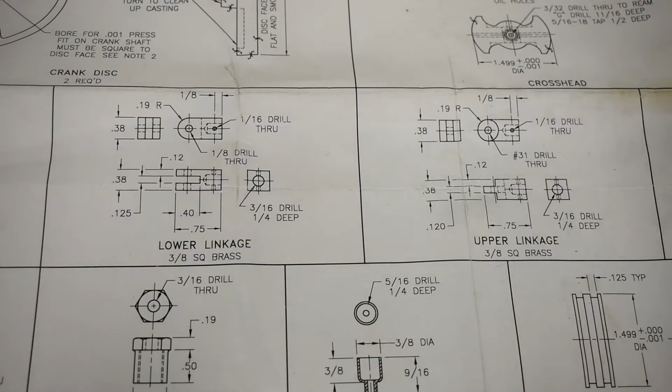I'm still waiting for my 5/8 precision ground steel round bar to come. So the crankshaft has been put aside for the time being, and while I wait for that I'm going to move on to these two parts. Now here we are. There's the piece of 3/8 square bar that they supply, and simple enough parts. And what I would like to do is make use of my rotary table for these.

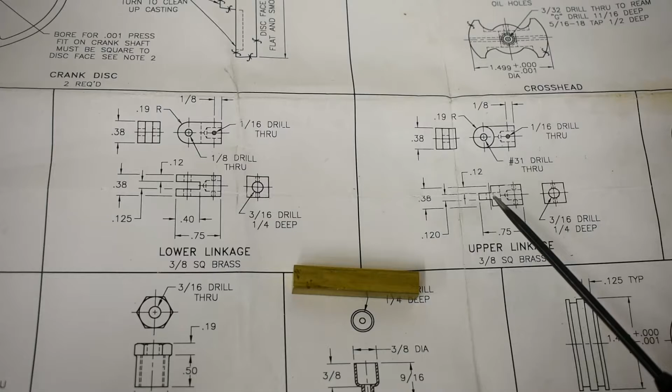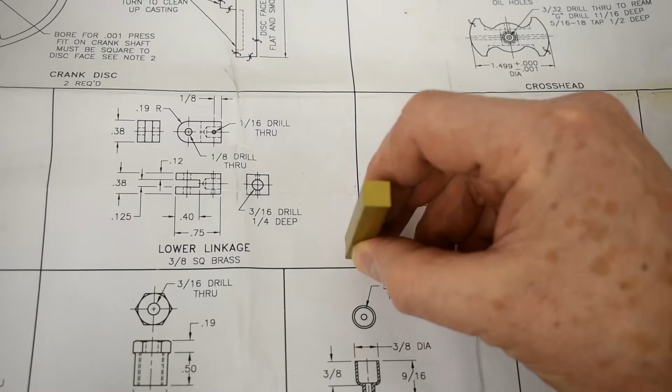So these two parts play together, so you can see this part has a tongue that will fit into this groove, and this part has a machined radius feature on it and a radiused end, as does this, so that they can swivel within each other. So a number of ways of making that feature. Of course, you can use a corner rounding end mill, stand this part up and round the corners. You can use a filing button to accurately hand file that shape, or you can freehand it.

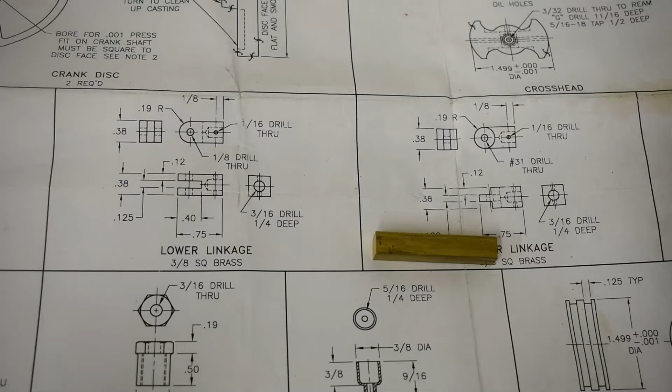But I've decided that the way I want to do this is to use a rotary table, and I'm going to use a technique and a tool that I got from Joe Pie. Here's the tool. Now you can certainly make these. I chose to buy one directly from Joe Pieczynski's website. He does two sizes of these. So there's a smaller version for smaller mills, but this is a really useful setting up tool.

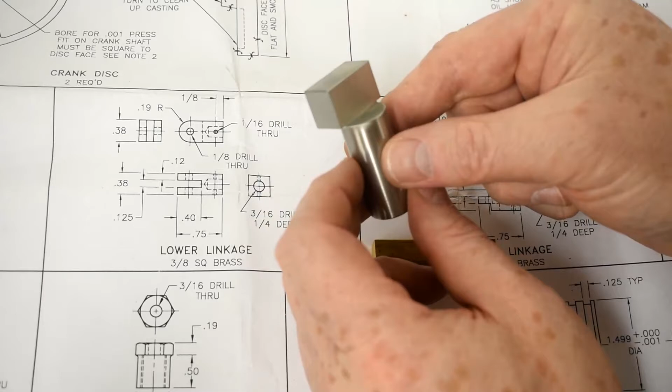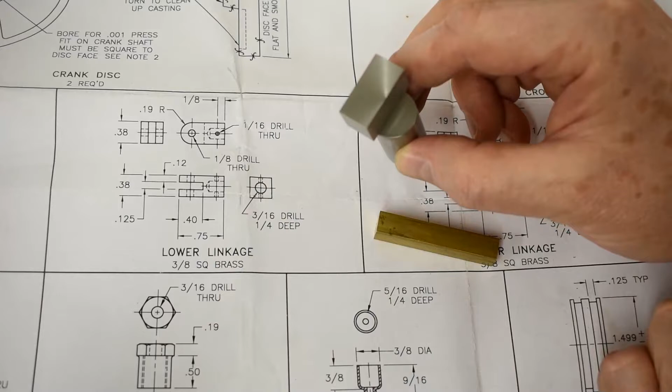It's a 3/4 inch diameter with an accurately machined rectangular boss on the end. This face is accurately on center, and then these two faces are each .500 away from center, and this face is .500 away from center. So this becomes a really excellent tool for setting up a vise on the mill, or indeed has a number of other uses.

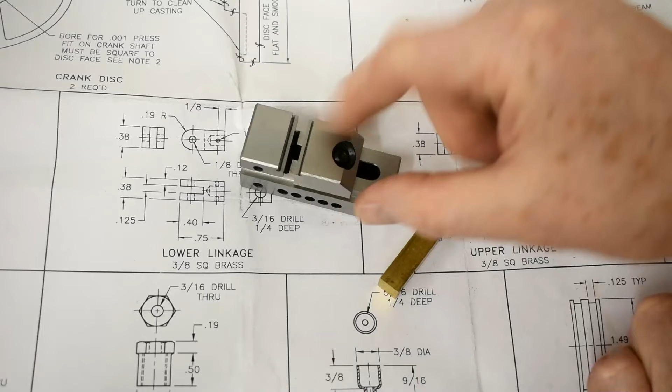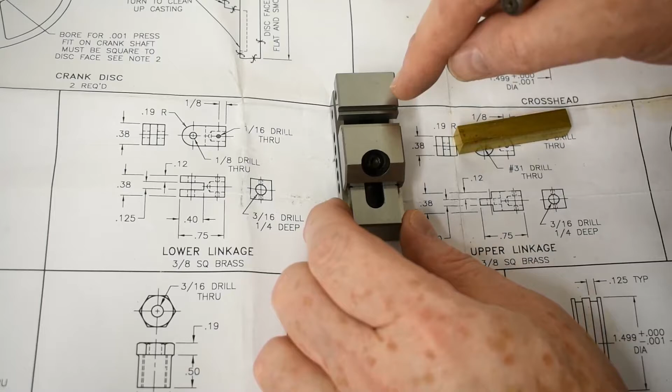But with that in mind, here is the teeny tiny toolmakers vise that I just acquired, and this is what I'm going to use to hold this piece of stock, and probably another piece of stock as well. So I can easily clamp this, and I can position it and find center with the milling cutter, and then the idea is that I will find this fixed face, position it half the thickness of the material so that I establish the center line of the material, and then I can use the rotary table to rotate it around under the cutter to form that radius.

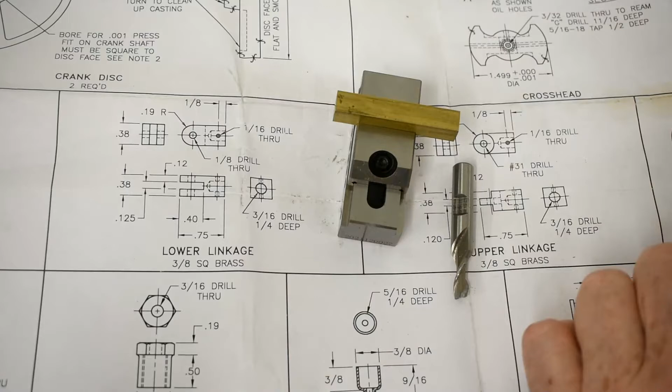So as I set it up, we'll get more into that. I'm going to use this tool to accurately find the location of the fixed face and get the center position, and then I will start by cutting this part, and we'll see how we get on. Alright, off to the mill.

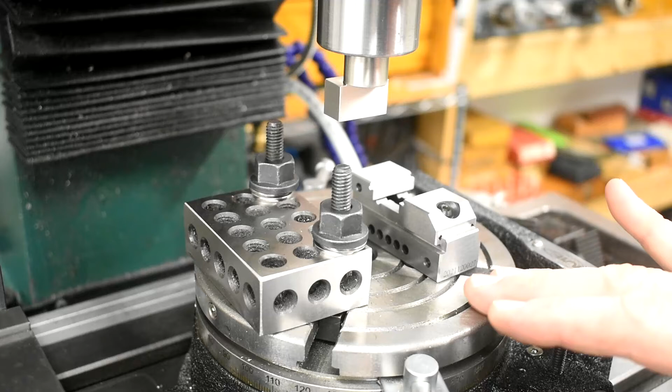So this is my rotary table. It's a 6-inch rotary table. It's an import, so it's a very reasonable price, and honestly the quality is actually very, very good for what I paid for it. And this is actually the first time I've used it, which is one reason why I'm so interested in using it to put a radius on the end of this square bar, because I just want to try it. So I have a 1-2-3 block clamped in place. This is going to provide a straight edge,

and then the next part of the approach will be to use the alignment tool to position this vise relative to the center of the table. Now I've already found the center of the table. I used my coaxial indicator to do that, so that is set to 0. So this surface is now trammed and is moving parallel to the y-axis in and out of the machine. So now I can continue with the setup.

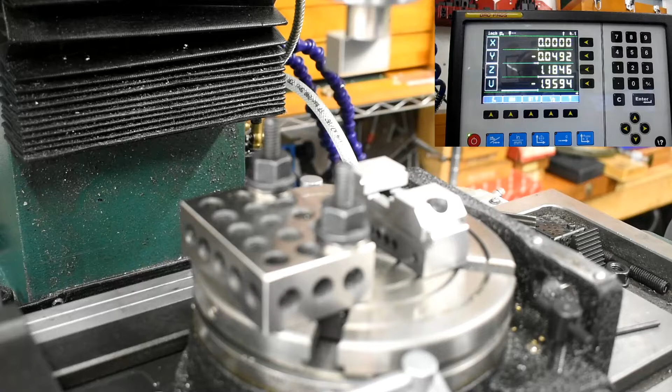So the basic idea here is to set the vise up like this. And what I'll use is an adjustable parallel here to keep this vise parallel to this surface once I've established location of this surface. So right now we know that this surface is right on center line of the spindle. I found the center of this earlier on, so I can position the rotary table on the center of the spindle as well. So now what I'll do is return the spindle to 0. There we are. The table here is locked, by the way, so that I can't lose this position.

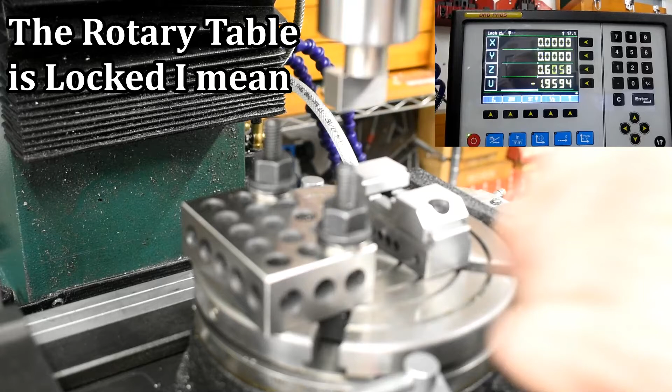Now we'll bring the alignment tool in. And we want to know where the fixed jaw is. Now I know that the fixed jaw is on the center line, but of course I have to position it this way. And I also need to move the fixed jaw of the vise half the thickness of the material I'm going to cut that way. So let's do that first.

The square bar, which is allegedly 3/8, measures out at 0.375 and 0.375. How about that, a piece of stock that's dead on? So I need to offset the Y 0.1875.

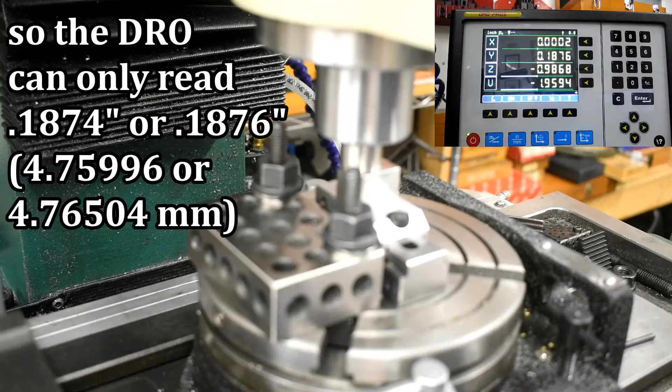There we are. The resolution only allows me to go between 4 and 6, so we'll call that good. So we now have the vise positioned in the Y direction such that when the piece of material is clamped in, the material's center will be on center line. Now what I need to do is move the table over so that I can get a sliding parallel in there and allow the material to overhang the center of the table so that I can rotate the end of the material around center.

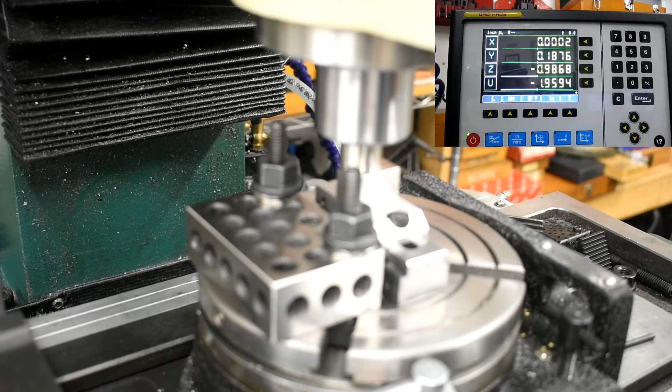So that should do it. Now, as you can see, we can put the sliding parallel in there, and we can make sure that there's no play in this vise. There we are, that's absolutely tight in there. Okay, so with that position, now I can clamp this in place, and what I'll do is I'll go off camera for a moment while I get some clamps and get that set up.

Okay, so I've got the little vise clamped to the rotary table. Currently the center of the rotary table is .1876 inches away from the center of the spindle. So that sets the relative position of the back jaw relative to the center of the spindle. Now when I return the table to the 0 position, that will basically put the center line of the material on center with the table. So that's next, and then this vise is positioned to allow the material to hang over the edge so that when the table rotates, the end of the material can be cut. So let's get to that.

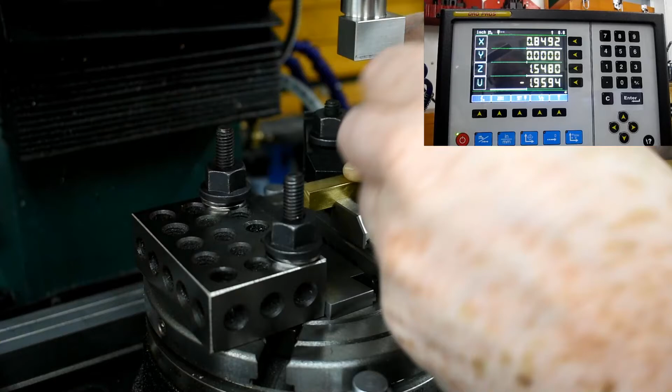I've repositioned this a bit and made sure that I've got enough material in front of the cutter so that I can get a full radius. The XY table is locked. I'm now going to unlock the rotary table. I've made a note of the position of the table so that I can return that to this position for drilling the center hole and for milling the top face. I've moved the table off 375, the diameter of the cutter, so that I'm sweeping the edge here, and now nothing remains but to try it. So let's see.

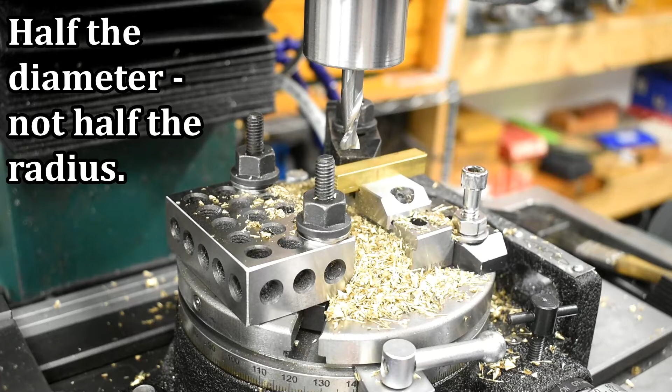So while I've got the setup in place, I'm going to do the other part of the linkage, at least the radius part. So I'm currently at center. So again, move the table across, and it's half the thickness of this part plus half the diameter of the cutter. It just so happens that this and this are 3/8.

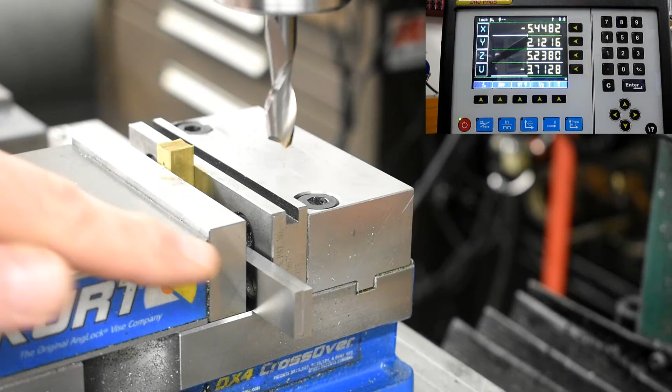Alright, so I've got the part set up in the vise, just squared it up on a pair of parallels using a machinist square, and I'm going to establish height by touching off on the top of the parallels with a 5 thou feeler gauge. And then I'll be able to set that up on the DRO, and I will know where the position is for the height of the part.

So just to demonstrate that, this is a little easier way of protecting the tips of an expensive carbide cutter. Just move the feeler gauge in and out. And now I feel a light drag there. So I know that the cutter is 5 thou away from the end of the part. So I can now program the DRO, and that's 0.745 minus, because the final length is going to be 3/4 of an inch.

Now, when I come up and I reach 0, right around there, I know that the part, once it's machined, will be at the finished length. So I'm going to reposition the camera and begin cutting.

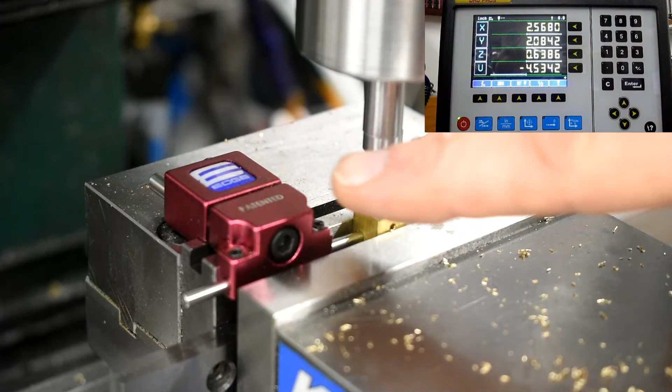Okay, so put an edge finder in here, and I've also set up a handy dandy stop on the vise because I have to do some similar work on the other part of the linkage.

Okay, so I was about to change this all out, and then I thought, oh, I could chamfer those edges using a chamfer end mill. So I've put one in, and basically this part is 3/8 wide. There goes the compressor. So since I already know the 0, if I come out 0.1875, then I put the tip of the chamfer mill right over the edge of the part. So I've come out to 1/4 inch.

And what I'll do is start this up, bring the chamfer mill down until I get the size chamfer I want, and that's just a visual thing, and then I'll lock that and I'll just walk around the perimeter of the part, put a chamfer all around it, and hope to God that that works out. Don't see why it wouldn't.

So I took the part out, and then of course it became glaringly obvious to me that I hadn't yet milled the final slot. So I'm going to do that now. But of course this is all very simple because I've already established these zeros, and so I just put it back in the vise on a slightly taller parallel to give me the clearance. I'm actually going to mill it in the Y direction just because it's not supported very well in the X direction.

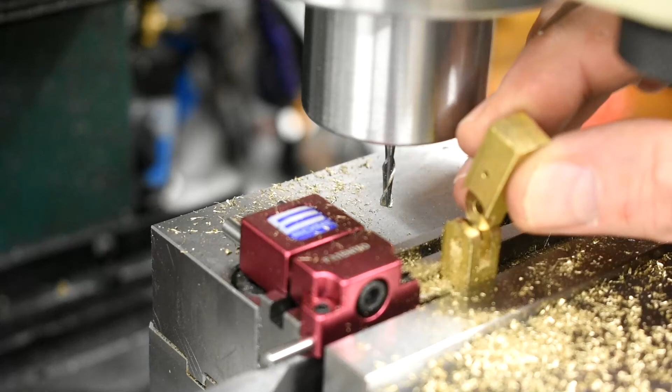And done. Let's bring this out a little bit and see how this feels. Not bad, but still a little tight, so I'm going to take another thou off each side.

That's as likely to have been the spring as anything that did that, but oh, that's much better. Oh, that's a perfect fit. Good. So now that part is done, aside from a little light deburr. Very good.

Here are the finished parts, along with my teeny tiny vise. I really like this. That's going to be very useful for model engine parts. Anyway, have a look at these. Very pleased with how these turned out. I gave them a little bit of a polish with a wire wheel on a Dremel, just to shine them up, and not bad at all.

The fit is absolutely perfect. There's no play in there at all, but nice free motion, and the pivot hole lines up nicely. I think the little chamfer on each end finishes it off. I wish I'd thought about that when I had these in the rotary table, because I could have chamfered all these edges, so next time I'll remember that. But there they are.

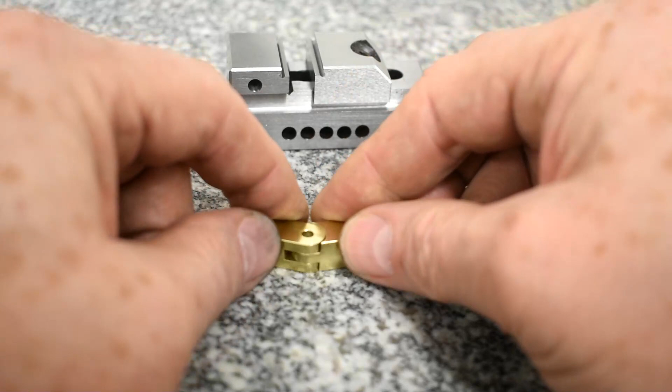Made a slight design change to that one. I made the part a bit longer than the drawing, put a thread in the end so that that can be an easily adjustable link, but there it is. And these are perfectly centered. There's no lip there at all, so I'm well happy with these. That's a successful first try of the rotary table, so thumbs up.